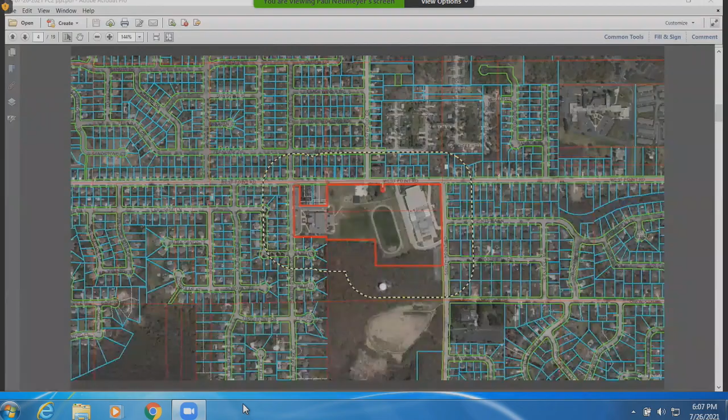Moving on to the corresponding actionable item, item number 2: consideration with possible action on a request to authorize a conditional use permit for a metal storage building exceeding 120 square feet in a public institutional district, located at 1520 South Point Road, submitted by Kale Polsinski, Green Bay Area Public School District property owner.

Thank you, Madam Chair. I'll give a few more details about the site. The property is highlighted in red here. This is one parcel, approximately 26 acres in size. West Point Road is to the north, South Point Road heading north-south here, with Lombardi Middle School, the athletic field, and Martin Luther King to the west.

This request will replace an existing shed on site, located approximately south of the athletic field. The new building will be built or constructed up near the northeast corner of the athletic field.

Regarding the future land use, the comprehensive plan recommends here - that's considered the comp plan. The property is basically... oh, just so you know, you are...

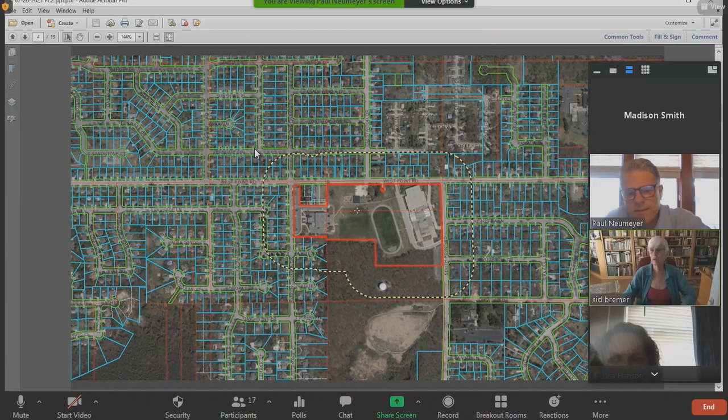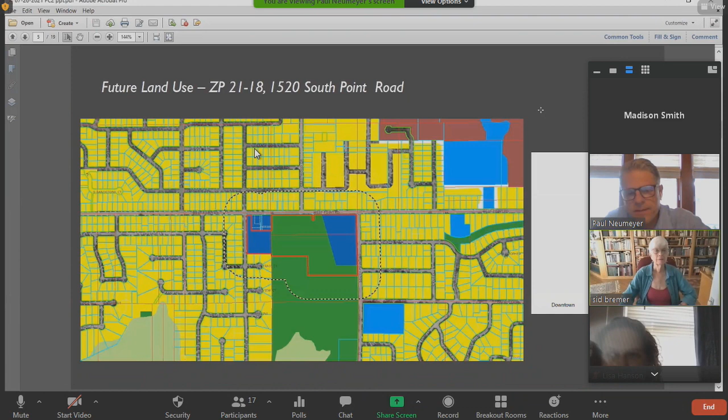This is the site plan of the site. Again, West Point Road is to the north here. I apologize. Can you hear me? Right now, yes. Okay, it just keeps breaking up. Yeah, you have some lag. Sorry, I apologize. Okay.

This is a site plan showing the property. The existing shed is in this corner down here, south of the athletic field. The proposed building will be up in this location. This is a 30 by 30 structure, so it exceeds the 120 square foot maximum.

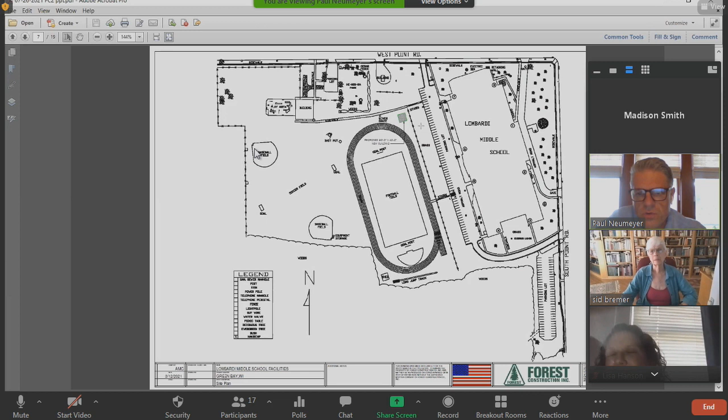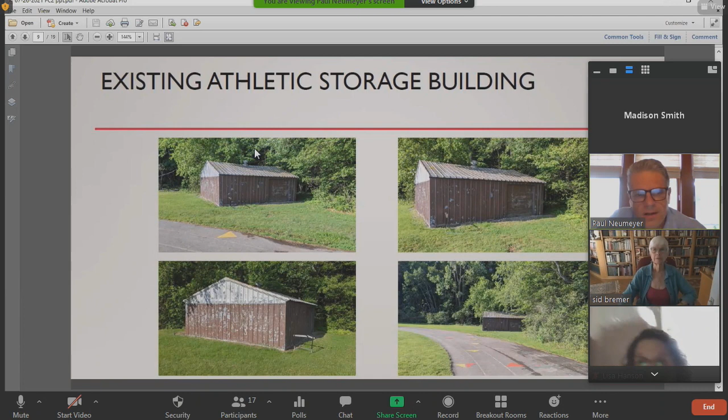These are some elevations of the proposed structure, showing the metal exterior and footprint of the building. Some of the next graphics are provided by the applicant, showing the existing structure in its rough shape and the need for replacement. They propose a color palette consistent with Lombardi Middle School.

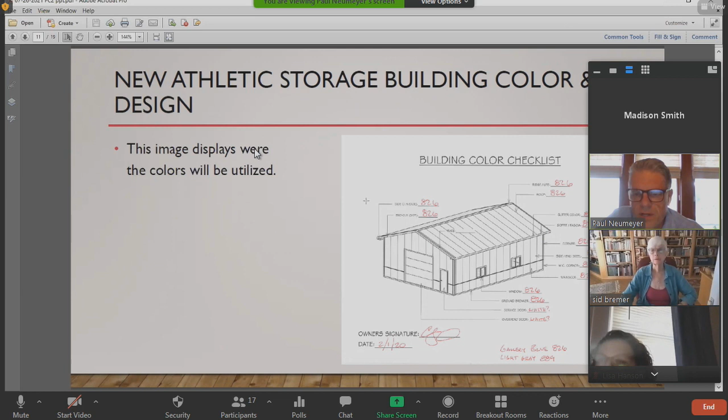Here they're calling out the colors. There'll probably be a two-tone color scheme on this proposed structure, and here's an example of that two-tone look and feel.

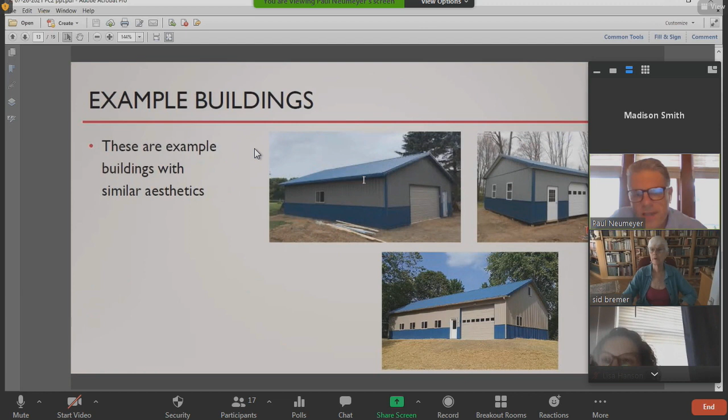Staff has notified affected property owners. We haven't received any calls or questions. The placement of this really doesn't detract from the overall neighborhood, and staff is supporting this request, subject to standard site plan review and approval.

Okay, thank you so much, Paul. So it's a 30 by 30 building - 900 square feet, replacing about a 24 by 24 building. Okay.

Go ahead, Commissioner Bremer. Thank you. Paul, one of the comments made is that the new building would not be visible from the main roads that go around the school property. Have you checked that out, or do we have some other way of knowing that? It looks awfully close to those roads, and I'm kind of curious about that.

If you put the site plan back up again, I think you'll see what I'm referring to. I did not make it out there to take a look myself, if anybody else did. The report said... yeah, I was just gonna say, I did not make it out there, but I did pull up the Google image of it. It does look like you would be able to see this building from West Point Road.

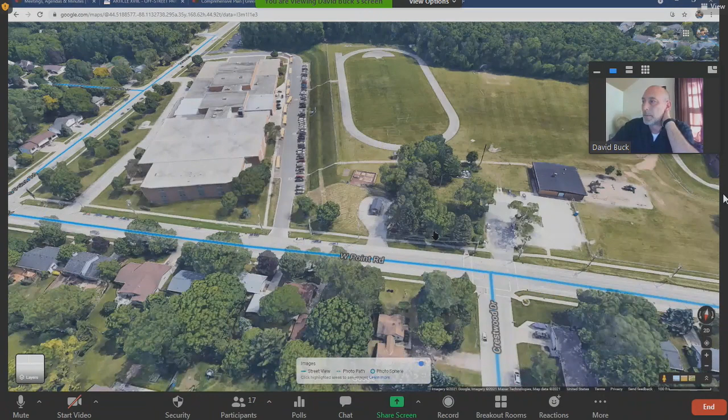Correct. So if I go from basically the entrance, it would be sort of up on this hill, in this area. Oh, that is helpful.

I had a question for Paul. So I did a little digging into some of the other sports facility buildings like this from some of the other schools around town, and I didn't really see a real cohesion with the building matching the facade of the school or any of the other buildings on site. Is that something we're concerned about? Is that something that is required? If someone were to put a larger structure like this on their own personal property, would it have to match the facade of their house? Or is that something that is different with this type of use?

Yeah, I think with this use it's slightly different in the sense it's an institutional type use. The principal use as a middle school has a brick exterior. This is a detached accessory structure, really more incidental to the overall structure. So I think to require masonry on a structure like this, I'm not sure is even possible, but I think the attempt here was to mitigate that by using a color palette consistent with the school's logo, not so much the building itself.

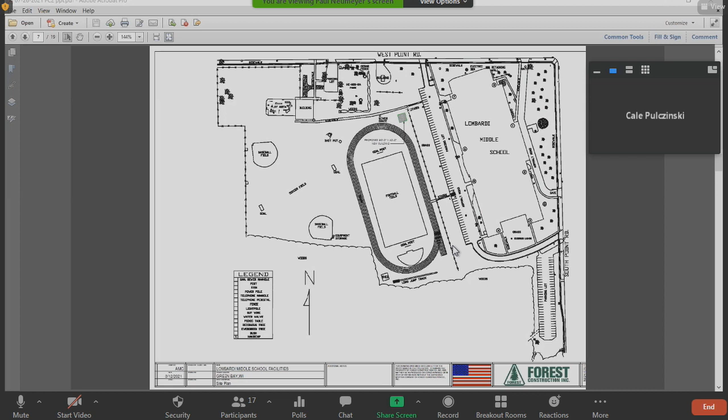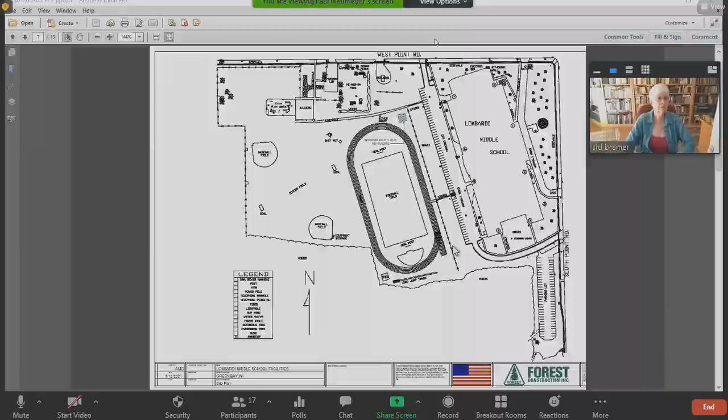Also, where you see the fence line that runs essentially north and south, there's a pretty steep elevation change there, so you really can't put any sort of building or structure on that elevation. And putting it on the other end of the track and field and football field area would have invited the same vulnerability to vandalism you mentioned before. Is that correct? That was our thought process, correct. Okay, thank you, that does explain what I was wondering about.

Do we have any more questions for the petitioner? I think now that I know it's built, I want to see it moved 6 inches over. Oh, thanks. No, Ken, yeah, nothing else.

Any further discussion? All right, go ahead with a voice vote. All those in favor? Aye. Aye. Aye. Any opposed? So then that will go through, unanimously approved, going to City Council. And when is that next City Council meeting? I can't math at the end of the month. Sorry, August 2nd, I believe, or August 3rd, Tuesday, August 3rd is the city council meeting. I don't have a calendar in front of me and I'm mathing at the end of the month, adding in 7 days plus 1. Okay, perfect. All right, so August 3rd.

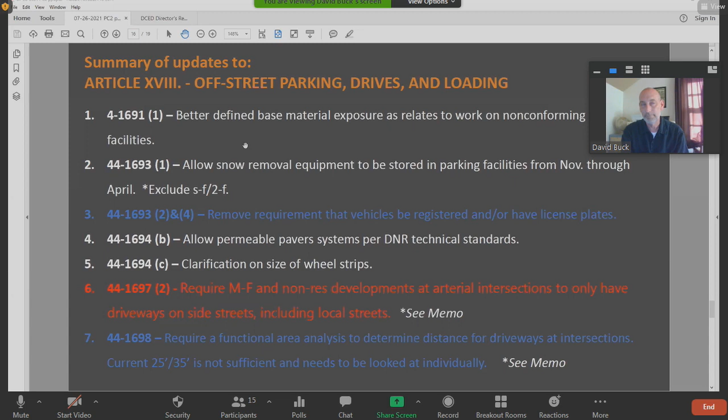And we basically came up with 14 amendments. And before I get into them, what I really want to say is that we really want this item to act as a workshop, so a lot of free-flowing talking about each of the items. If there's anything that you as commissioners have noticed to have been problematic in the code, bring that up and we will jot it down and look into it. And then we would bring this back on August 9th for actual action.

There is one item that we received late correspondence from DPW late today about one aspect. And that one you might need a little bit more time to digest. I think staff does as well.

But I'm just going to go over these really quickly, and you'll notice the red, white, and blue that's on here. So the white is basically an amendment or a change that no matter where it came from, there was no disagreement, everybody agreed with it, no problem. The blue is where it has full staff support, however there was considerable discussion. And then the red is where there is potential conflict or controversy between staff, and we can kind of get into that.

So I'm going to go through all of them really quick, and they do correspond. In your packet, there should be a summary list, and it has the page number and the section. And then in the code itself will be the draft code that's in your packet. We'll have a red strike through for text that's being deleted, and red underline for text that's being added or augmented.

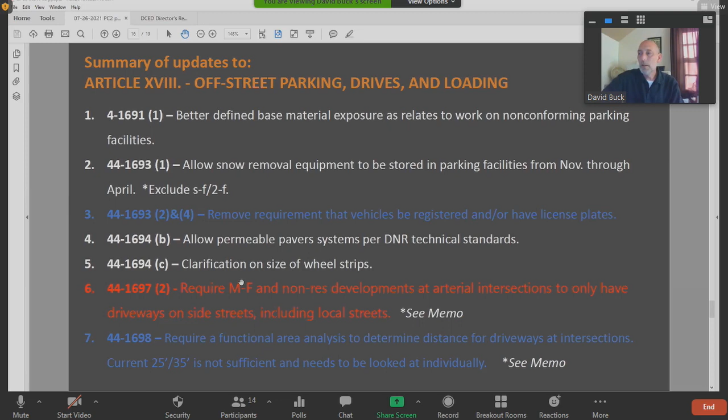So those are the 14 items. I did want to give you a little bit of a heads up about what those roads are.

A principal arterial street is intended to provide high volume, moderate speed traffic between major activity centers. This is coming out of our 2000 comp plan. A minor arterial is a street which augments and feeds the principal arterial system, intended for moderate volume, moderate speed traffic, where access to abutting property is partially controlled.

Those are our arterials, the big streets. We also have a collector street, which collects and distributes traffic to and from local streets and arterials—taking local traffic to a collector, then up to an arterial. Dave can probably give you some good examples. A local street is a low volume, low speed, short length street, typically accessing residential or low impact businesses.

In 2000, when the comp plan was done, the city was shown to have about 10% principal arterials out of all our streets, 11% minor arterials, about 11% collectors, and just about 68% local.

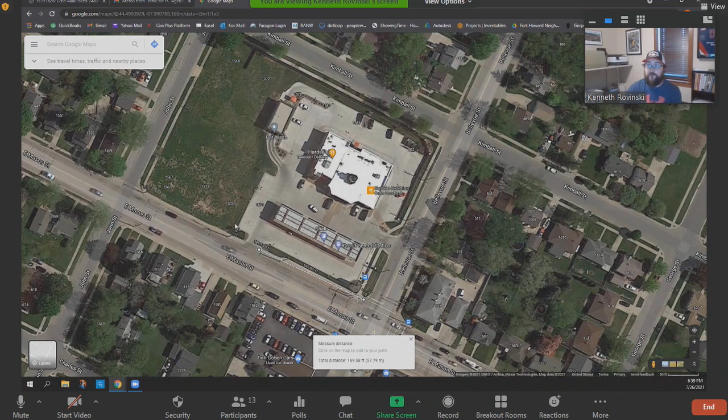I'm looking at the distance from the intersection to this driveway here, it's 189 feet. And if I'm correct, I believe this is a 35 mile per hour zone. That would mean this driveway opening wouldn't be allowed per the new code?

That's not correct, well, number one, that is a 30 mile an hour zone, so it would be 200 feet. You can tell that I believe this is two parcels because they were supposed to expand to the west. So what I'm seeing right here would actually be compliant with what I'm proposing. They just moved that driveway access as far off from the intersection as possible. So I don't see any problem with that.

Now, ideally, I think we'd like to see access off of Bellevue. Let's just say, let's consolidate the driveways from two. Now, sometimes logistically on the site, it may not make a lot of sense. Let's say for this situation, you have tanker trucks that come in on a regular routine, and they have to get around somewhere. Well, they're not going to be out of that same access. So two access points for this type of land use is probably more realistic.

So quite frankly, other than potentially there being a shift to the Bellevue Street access location, the one on Mason Street, I think, would have been compliant with what I'm proposing. Yeah, if this were two parcels, that would fall under what David was talking about before, that it's the furthest you can get functionally. The other thing, if I can add something to this, if there were a development on this green space, that driveway also would have to be pushed as far to the east as possible.

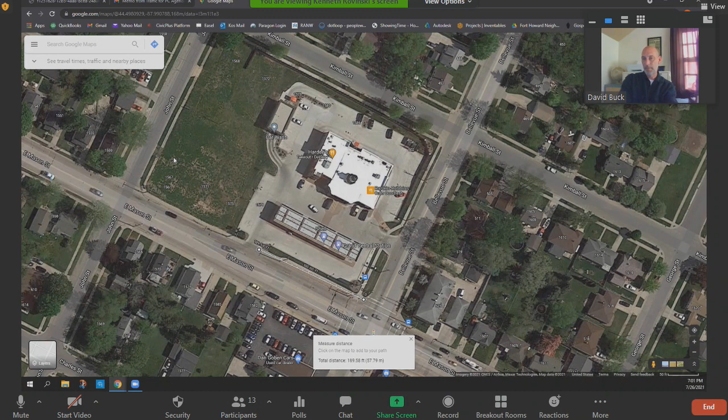And preferably, if putting words in David's mouth, preferably you'd exit onto John, not Mason. That's what we're kind of talking about, that if there was a new development in that green space, it would have to have its exits out to John Street. Or does it, because we're talking local arterial versus other? Right, the ideal would be for them to go onto John Street with the proposal. However, if they were on Mason, they would have to try to get the upstream distance, whatever that would be, from that intersection back.

That's also a tough example, because we worked as part of a planned unit development for that property. So even though it's two parcels, the intent is to have that be a shared driveway on East Mason Street to reduce the conflict. So I don't think we want access to John Street or to Kimball because those are residential streets. The intent was to consolidate as much as we could.

You're saying that in the future, it's possible that green space will be able to utilize that driveway on East Mason? I guess it doesn't matter, but I'm just thinking for the future, not this specific property, I understand. Right, for this specific property, they would have to. Right, okay, sorry Paul. That's okay.

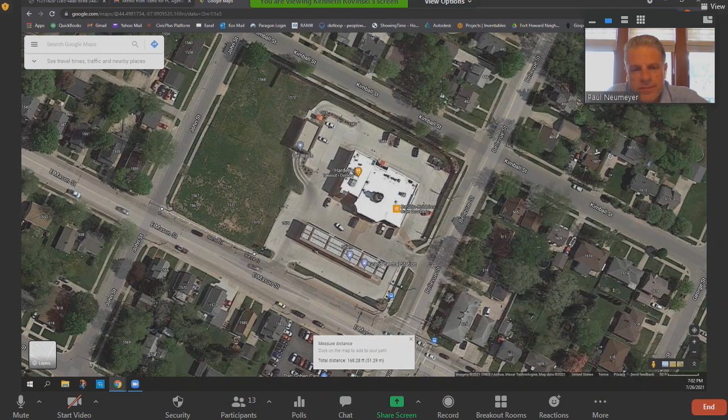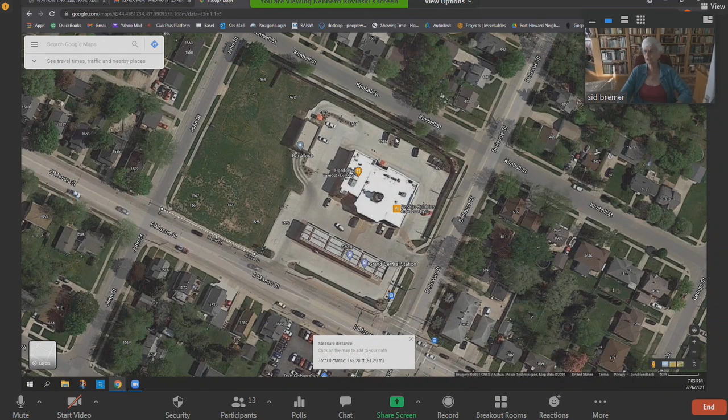It's sometimes difficult to compare apples to apples, oranges to oranges. Every situation is a little bit different, and that's the point I wanted to emphasize. As I saw it in the drafting here, there is reference to working out particular arrangements for particular circumstances. And I noticed, Dave Hansen, as you repeat the issues along here, you're often saying, ideally, we would want it this way. It's almost as if what we're talking about with your grid, your set of numbers or tables, is that we want to move as close to that direction as is feasible. Am I understanding that correctly?

That's ideally what we want. And if you cannot, based off limitations of the size of the parcel, as in the frontage, then you just have to push those driveways as far away from those critical intersections as possible. So we're looking for language here that would say as close to X or Y ideal as is feasible for any particular circumstance.

Equal or as close, yes. Is that it ultimately means if they can't meet that, they're going to be coming back to us to ask for permission to maybe do, like Paul said on this example, a PUD or some other kind of arrangement with the city that allows it?

Well, they could request a variance based on a hardship through the Board of Appeals. That's always an ability to do that with the zoning code. But yeah, we would have to draft the language to be flexible.

But again, it is a big shift from the existing. So perhaps now at the August 9th meeting, David, you could look at whether there's room to make that language more flexible, or build in the notion that there is some negotiating that needs to happen if the ideal can't be met. Yep, and for August 9th, I'll work with Dave to get maybe a couple examples, and then we'll talk language.